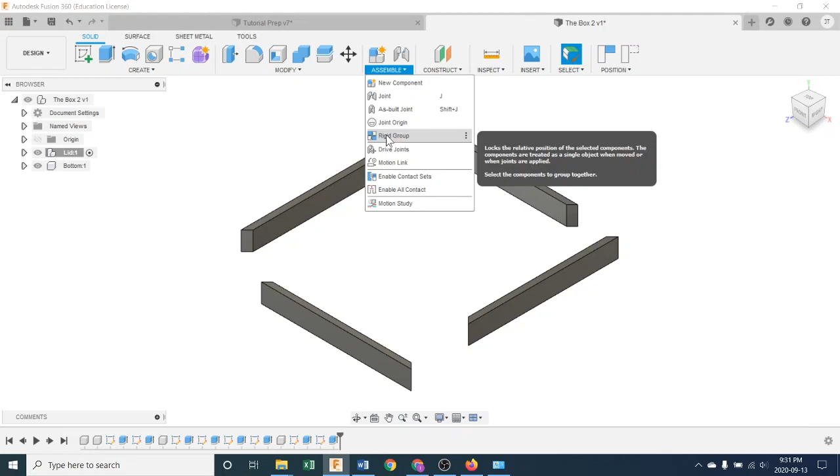Let's just make sure lid is picked here, and we are in 3D, isometric view. So the next thing we're going to show you is up here under assemble. We're going to assemble some stuff. So we'll click the drop down, and there are many different ways to assemble things, but we're just going to pick joint right here. We're going to join things together using a joint.

Click. And if this pops up ever, what do you do? Capture position. Notice you can get it over here too. Capture position. Boom. There we go.

Next step, we are going to do a standard joint. If you go under motion here, there's various kinds: rigid, revolute joints, slider joints, all sorts of stuff. We have to stay on rigid, so we're just sticking stuff together as glue would do. There's nothing fancy here. We're just gluing things together.

So the first thing you need to know is you're going to pick one part, and then click the place where you'd like that part to go. The first one you pick is the one that's going to move to the second one, and that becomes important at some point. So the first thing we're going to do is it says here, go pick your first one.

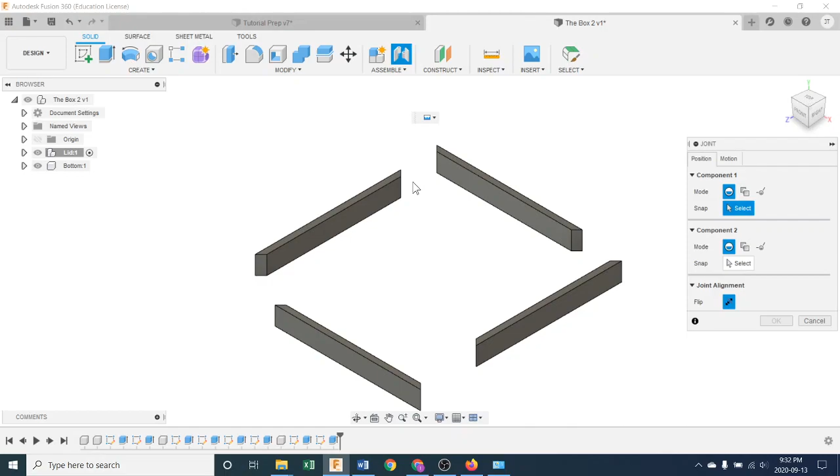Simple mode, yeah. So we're going to go select our first one, and let's pick our... we drew the front one first. Let's go pick it. Well, let's join this to this. It doesn't matter really. So see, as I go on any surface, I get this sort of symbol, and as I move around, I could pick anywhere on here, but it also snaps to common places.

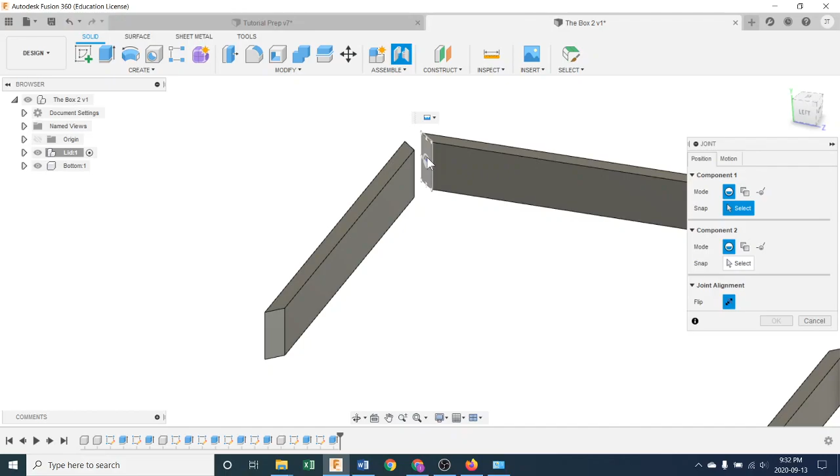Really what you do is you want to use these snap points. And so if I want to join these two together, notice this face. This face is the one I want to join to this mitered face. So where's a good place to pick? Well, it doesn't matter too much, but you can get some strange behavior out of some of them.

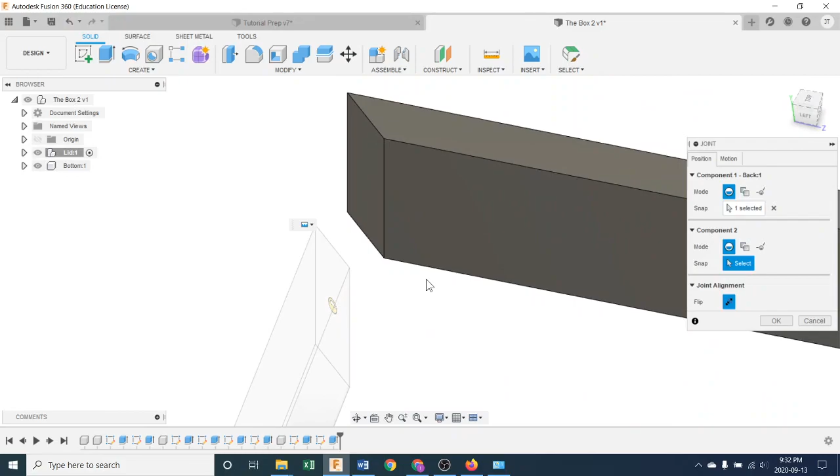So let's just try this middle one first. Let's just pick that, and it snapped to the middle, and let's pick this one over here. And see, it's moving around, snap, boom. Click, click, click. And it gives you that animation, because down here somewhere we got animation turned on, or at least you used to be able to turn the animation off, but it's kind of fun.

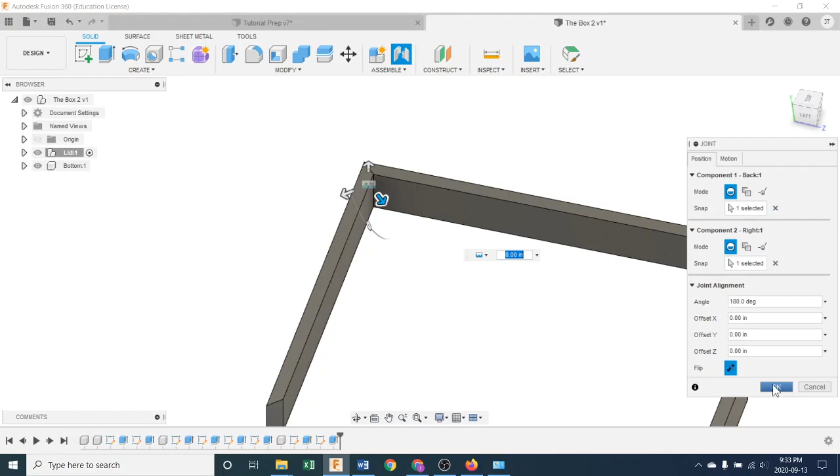And there we have it. So not only will we snap them together, but they're giving you — you have to say okay when you're done, saying I like it. So there's the first one. And it gives you the symbol of joints. What it did was it created a joint. If I go under lid here, under joints, there's my first one, rigid.

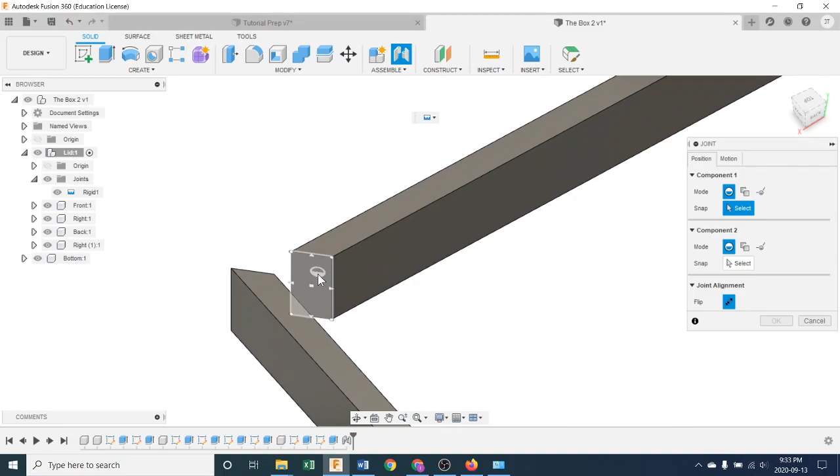So let's do another one. Let's go over here, assemble, joint, and we'll just pick this guy over here. Remember, we're orbiting around a lot — you should get really used to that. And we'll bring that one to here.

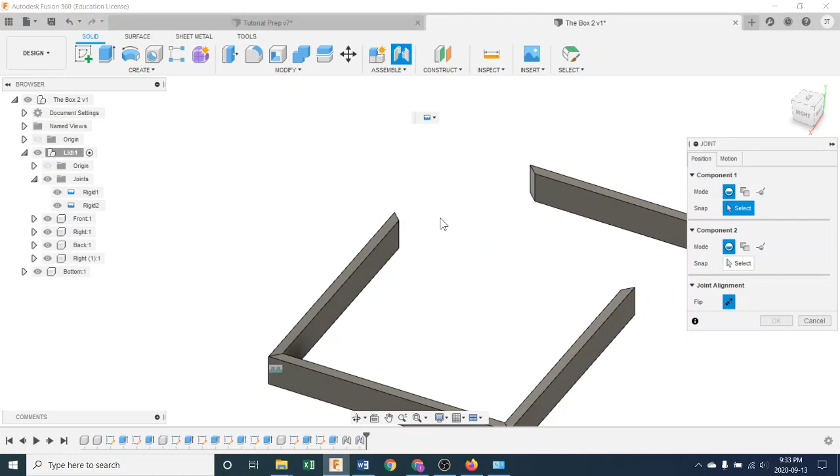Oh, so satisfying. Okay, the last one to make this solid, because this one's still floating and this one's still floating, but it's all together now. So we can go assemble, a joint, and we'll go capture position. And we'll say take this guy from there, and we'll put you right there. And push OK. Look at that. It is joined up. All good.

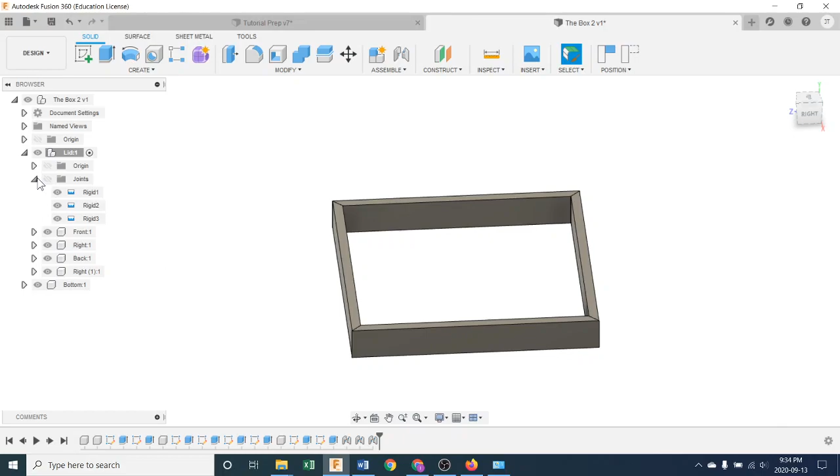And the last thing here is to show you that you can turn these on and off. So if I turn this joint eyeball off, all those little symbols go away, which is a little more satisfying. We can turn them on later if we ever want to see them again. So underneath lid, that's what we got now.

We got all our sides, front, right, back. Oh, notice right became right one. What's this one? This isn't right, so we never renamed it in the last video. So I'll do that right now. Slow click, and this one was left. It came from the right because we copied it, but there we go. So we got the front, right, back, left. Okay, and it's all joined together.

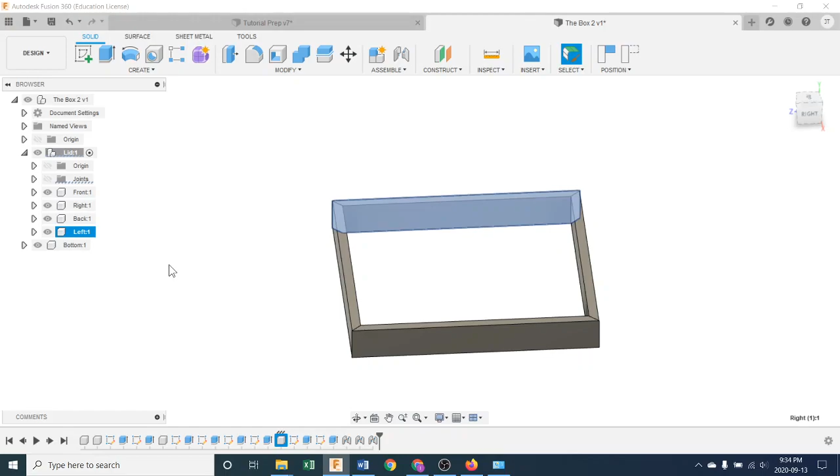The only thing left to do now is to create a top for this thing and join that. So that's in the next video. We've now learned how to join pieces together. Tutorial 4, I bet you can't wait.